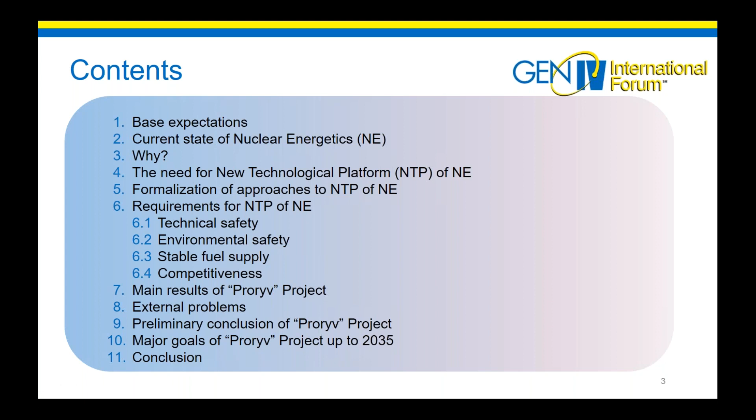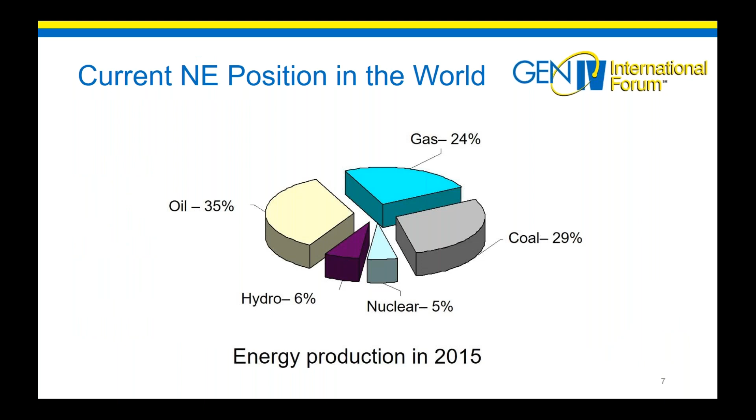Slide 7. On slide 7, you can see that today nuclear energy share is just 5% compared to other means of energy production. Slide 8. Current forecasts are also quite pessimistic, not only for Russia. Here you can see 3 scenarios. Here you can see nuclear energy share, which is marked in green, and its probable scenario, preferable scenario, and critical scenario. And they are all not very optimistic.

3 scenarios have been developed for Russia that carry on the logic of world scenarios. Probable scenario includes all the ground lines of world scenario, combining them with preservation of current economy and energy sector performance of Russia. Russian economy in this scenario will reach after 2020 moderate growth rates of 2.2–2.4%. Energy balance structure by means of generation will be kept intact in Russia. Thermal power plants will remain the foundation of electrical power generation, providing in all scenarios approximately 62% of generation by 2040. Slide 9, please.

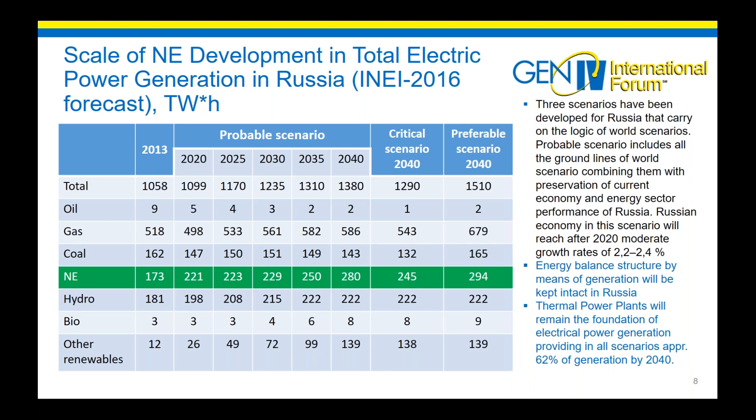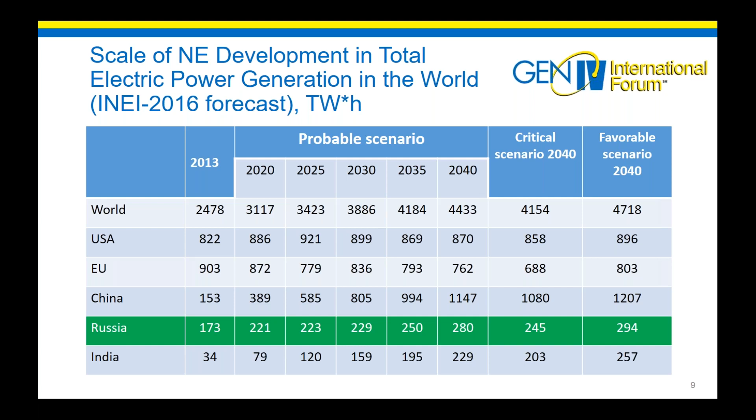Nuclear energy development scenarios are also quite pessimistic for the world in general, excluding, of course, China. Here you can see Russia marked in green. Slide 10, please. And naturally, there arises a question, why so? Let's try to answer it. Slide 11. The basis of modern world nuclear energy are thermal reactors with uranium fuel in an open nuclear fuel cycle. Here you can see annual flows of nuclear materials in open nuclear fuel cycle of 1 gigawatt electrical production.

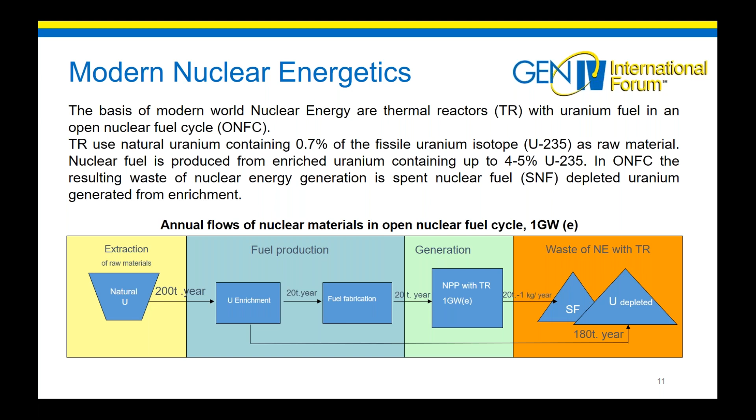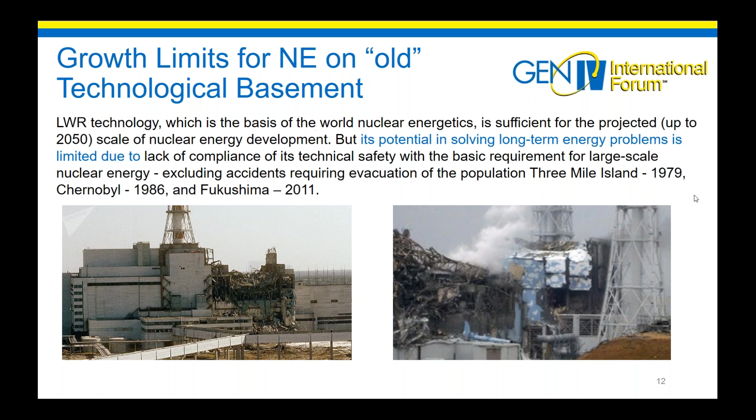On slide 12, it should be noted that the current technological base of thermal reactors with open nuclear fuel cycle is sufficient for the projected up to 2050 scale of nuclear energy development, but its potential in solving long-term energy problems is limited due to lack of compliance of its technical safety with the basic requirement for large-scale nuclear energy, excluding accidents requiring evacuation of the population. Slide 13.

But besides this obvious limitation, there are other systemic problems of the old technological basement of nuclear energetics. They are low utilization efficiency of the extracted natural uranium, lack of environmentally acceptable treatment of the long-lived high-level radioactive waste, minor actinides, and so on, and proliferation concern. Slide 14.

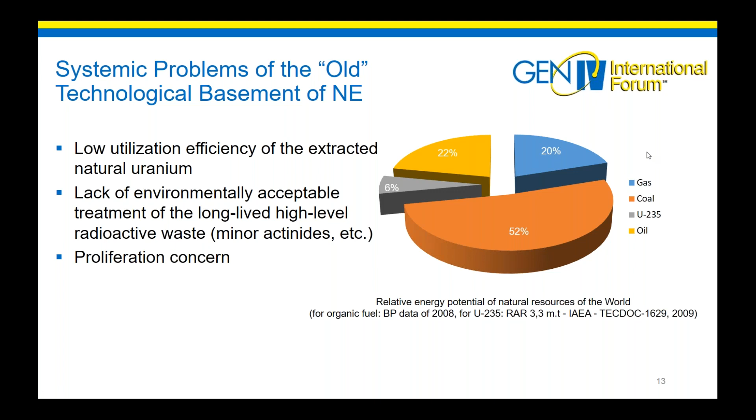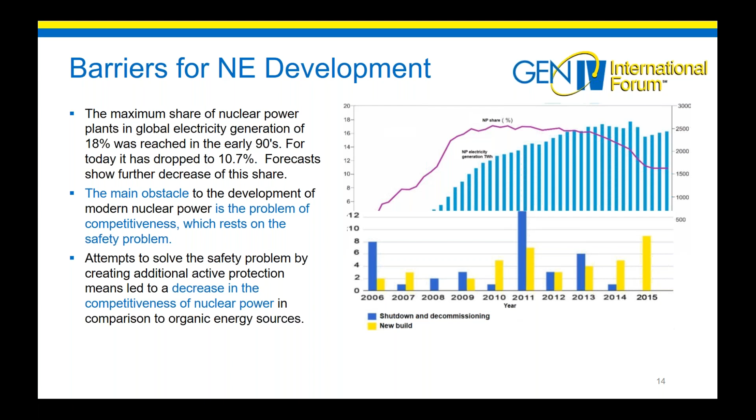Barriers for nuclear energy development. The maximum share of nuclear power plants in global electricity generation of 18% was reached in the early 90s. For today, it has dropped to 10.7%. Forecasts show further decrease of the share. The main obstacle to the development of modern nuclear power is the problem of competitiveness which rests on the safety problem. Attempts to solve the safety problem by creating additional active protection means led to a decrease in competitiveness of nuclear power in comparison to organic energy sources, which you can see on the picture here. Slide 16.

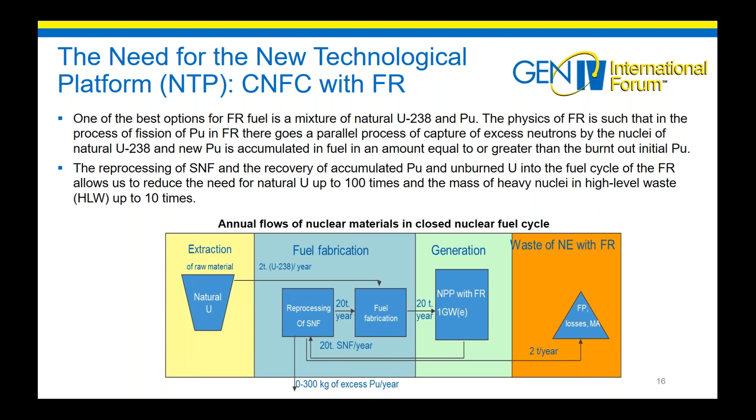Advantages of closed nuclear fuel cycle to an open nuclear fuel cycle. These advantages are in minimization of fuel and radioactive waste flows, in lowering stored spent nuclear fuel quantities, and in lowering stored plutonium quantities.

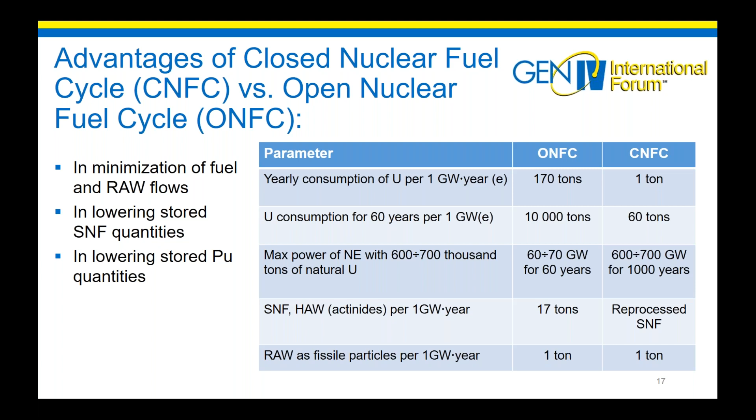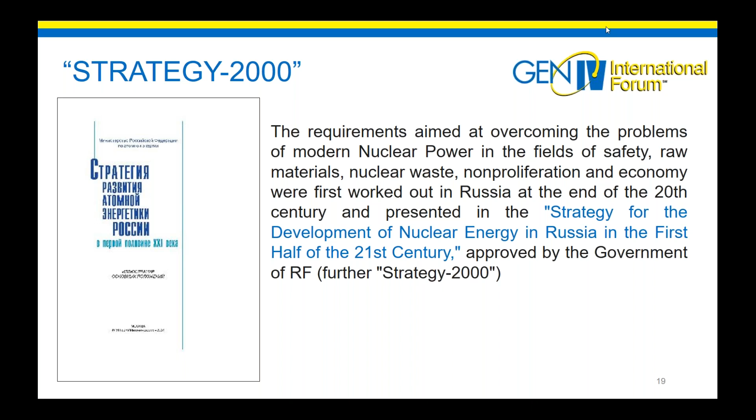The requirements aimed at overcoming the problems of modern nuclear power in the field of safety, raw materials, nuclear waste, non-proliferation, and economy were first worked out in Russia at the end of the 20th century and presented in the strategy for the development of nuclear energy in Russia in the first half of the 21st century, approved by the government. It's called Strategy 2000. Slide 20.

These requirements follow the world trend. Within the framework of the largest international forum, Generation 4, organized at the beginning of the 21st century, nuclear technology developers elaborated requirements for the new generation of reactors. Among the 6 technologies chosen for joint development, 4 are different technologies of fast reactors and closed nuclear fuel cycle.

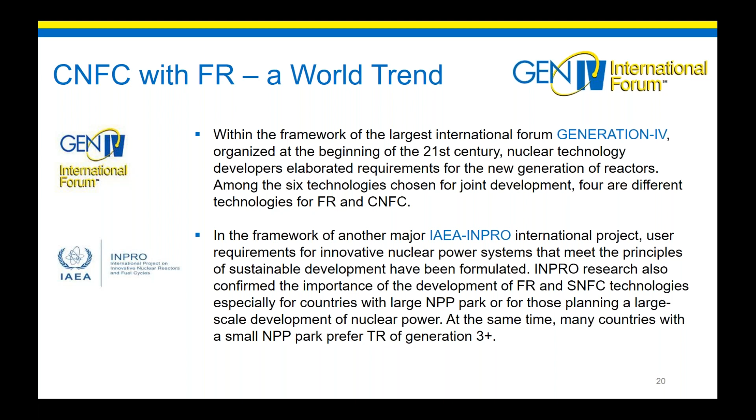In the framework of another major international project, INPRO, user requirements for innovative nuclear power systems that meet the principles of sustainable development have been formulated. INPRO research also confirmed the importance of the development of fast reactors and closed nuclear fuel cycle technologies, especially for countries with a large nuclear power plant park, or for those planning large-scale development of nuclear power. Slide 21.

Slide, yes, thank you. Now, what exactly are the requirements for the new technological platform? They are, of course, technical safety of nuclear energy, elimination of accidents that require evacuation of the population; also environmental safety of the nuclear fuel cycle, solving problems of long-lived high-level waste handling and spent nuclear fuel accumulation; sustainable fuel supply for nuclear energy, since a closed nuclear fuel cycle can become the basis for long-term provision of nuclear fuel raw materials for thousands of years; and competitiveness of nuclear energy.

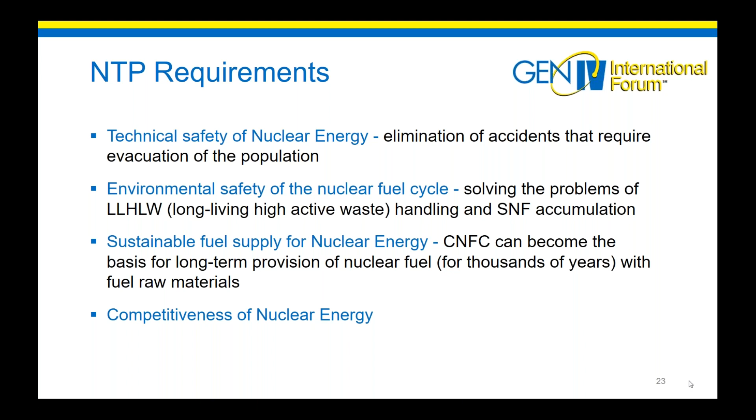Slide 25, technical safety. Let's elaborate the first requirement for the new technological platform, technical safety. The goal is clear. It's elimination of accidents at nuclear power plants and other nuclear fuel cycle facilities that require evacuation of the population. Ways to reach this goal are clear as well.

We need to eliminate reactivity accidents, which may lead to the need for evacuation of the population. Eliminate accidents with loss of heat removal, which can lead to the need for evacuation. And exclude fires and explosions at nuclear power plants, which may lead to the need for evacuation. Slide 26.

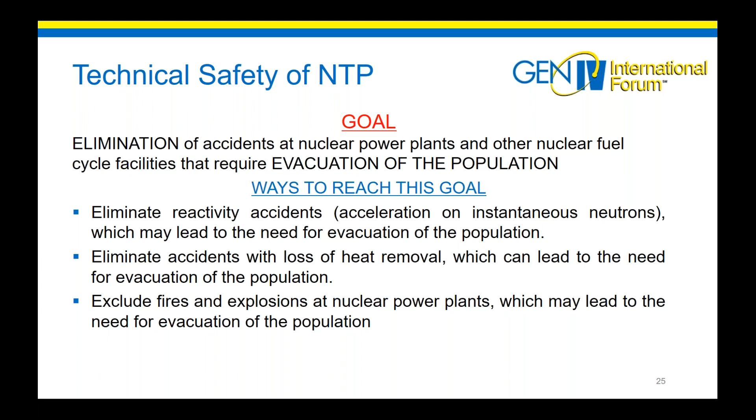The following means to reach the goal are suggested. They are dense fuel in the reactor core with zero reactivity margin for burnup, lead coolant, air heat exchanger, natural circulation of coolant with heat removal through the air heat exchanger. Fires and explosions at the reactor unit with the release of radioactivity should be excluded by physical and chemical properties of the coolant and structural materials that do not enter into an explosion or fire hazard interaction with the environment, water and air, with evolution of hydrogen.

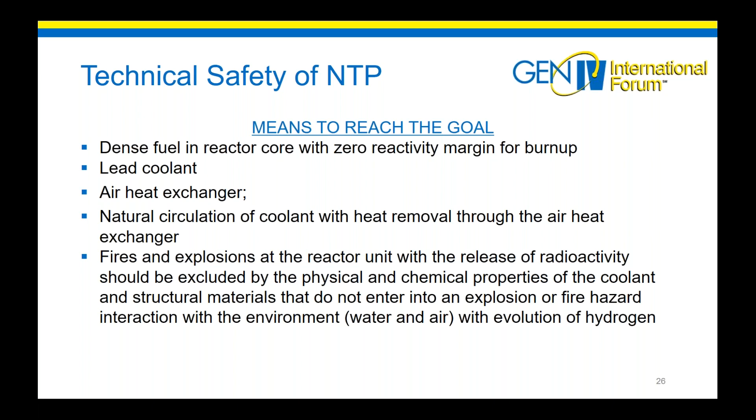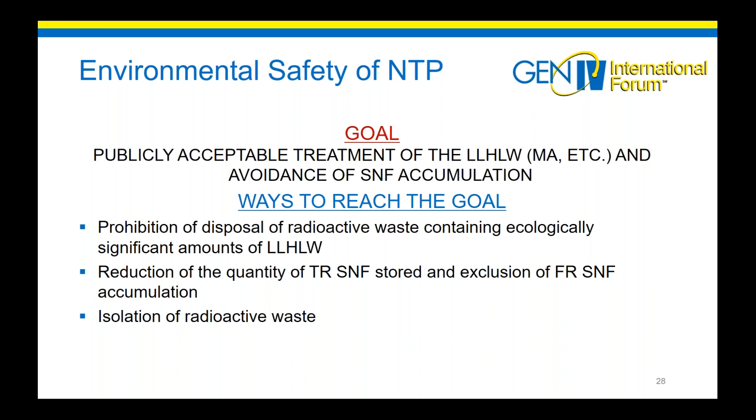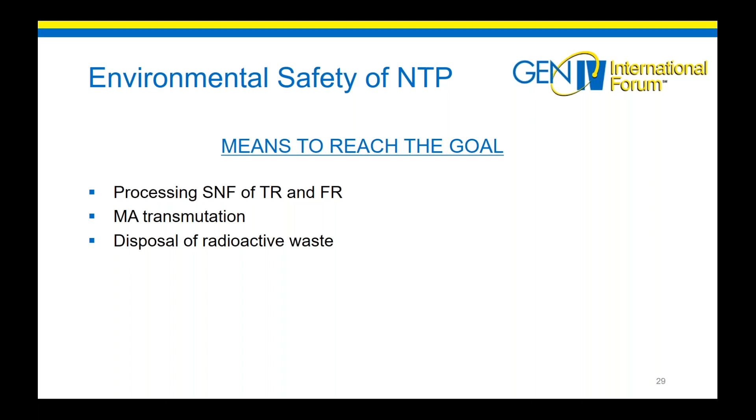Slide 29. The means to reach this goal are processing spent nuclear fuel of thermal reactors and fast reactors, minor actinides transmutation, and disposal of radioactive waste. Slide 31.

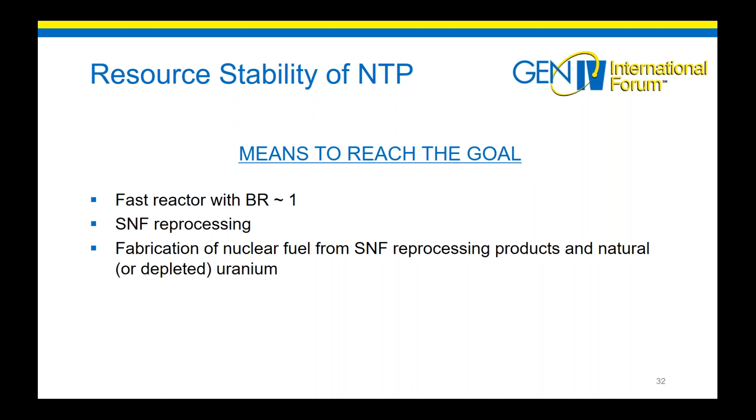Stable fuel supply. The goal is long-term provision of nuclear fuel raw materials for thousands of years. The ways to reach the goal are full reproduction of fissile nuclides in the core and transition to a closed nuclear fuel cycle. Slide 32. Means to reach the goal are in development, and they are a fast reactor with breeding ratio equal to 1, spent nuclear fuel reprocessing, and fabrication of nuclear fuel from spent nuclear fuel reprocessing products and natural or depleted uranium.

Slide 34, competitiveness. The following ways and means to reach the competitiveness goal are suggested. Elimination and simplification of a number of nuclear power plant safety systems. Reduction of construction material consumption by simplifying the design of the reactor. Reduction of the fuel component. Reduction of transportation costs. The on-site nuclear fuel cycle.

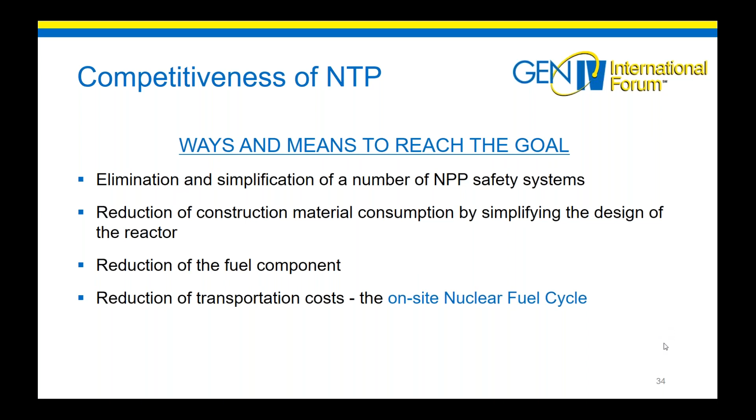Slide 35. Now let's move to the main results of research and development of new technological platform components in the Proryv project framework. Slide 37, technical safety.

As for technical safety, 7 main technical solutions for the reactor unit are suggested. Equilibrium core of the fast reactor, which allows to minimize the reactivity margin of nuclear fuel and practically exclude the acceleration on instantaneous neutrons. Also dense mononitride fuel, which makes it possible to implement an equilibrium core without uranium blanket.

Third, wide grid of the core, allowing to have such level of natural circulation that is sufficient to remove residual heat. 4. Integral layout of the reactor unit, which allows localizing coolant leaks in the bulk of the reactor body and ensuring conditions for efficient natural circulation. 5. Heavy liquid metal coolant, which allows to implement wide grating and to exclude positive void effect of reactivity.

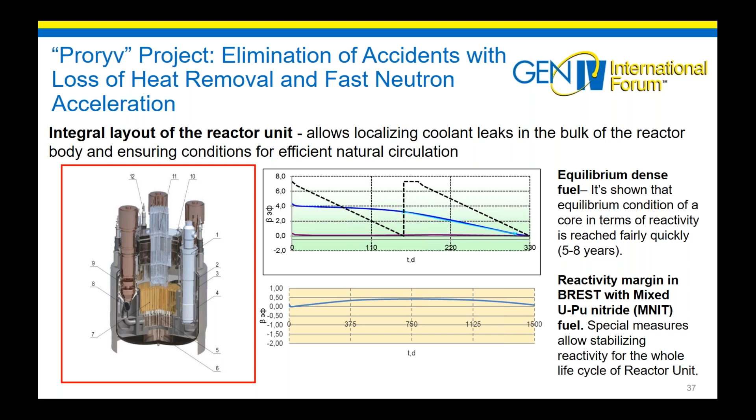Slide 38. So as for lead coolant technology, the technological regulations for the operation of lead coolant technology system for BREST reactor installation have been developed. Designs of the equipment of the lead coolant technology system also have been developed, and the means of quality control of the coolant, oxygen sensor, passed the acceptance tests. Here you can see the pictures of some of that equipment.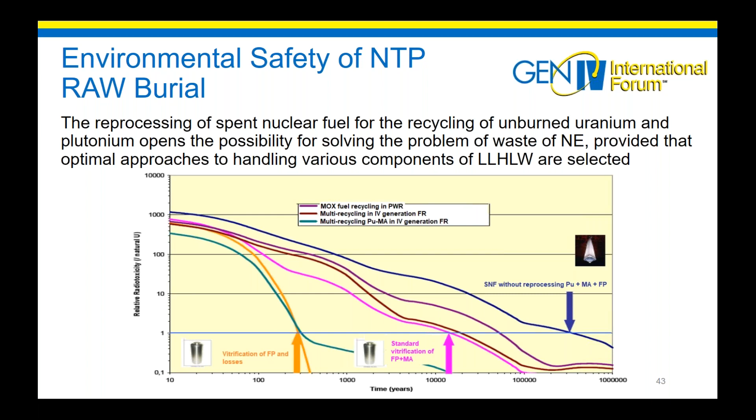Slide 45, robustness of new technological platform. 3 major technical solutions for closed nuclear fuel cycle. They are pyrochemical reprocessing of fast reactor spent nuclear fuel to reduce the duration of spent nuclear fuel retention before its reprocessing, and to exclude the separation of pure plutonium during its processing. No blanket design of fast reactors to exclude the production of weapon-grade plutonium.

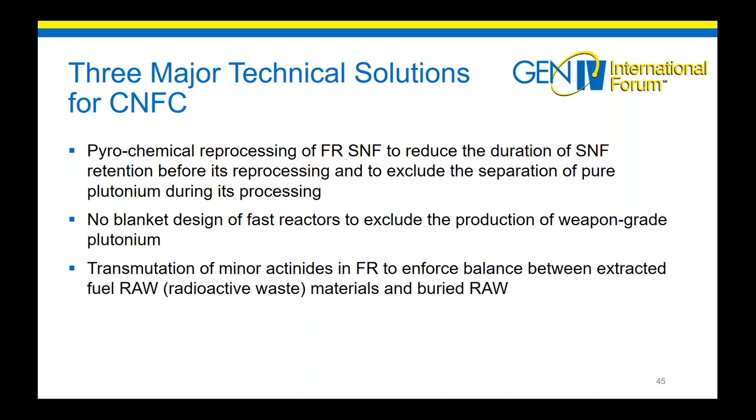Slide 47, raw material stability. As for raw material stability of new technological platform, it's enough to note that all types of fast reactors with closed nuclear fuel cycle allow changing raw materials base of nuclear energy from limited uranium-235 to practically unlimited uranium-238.

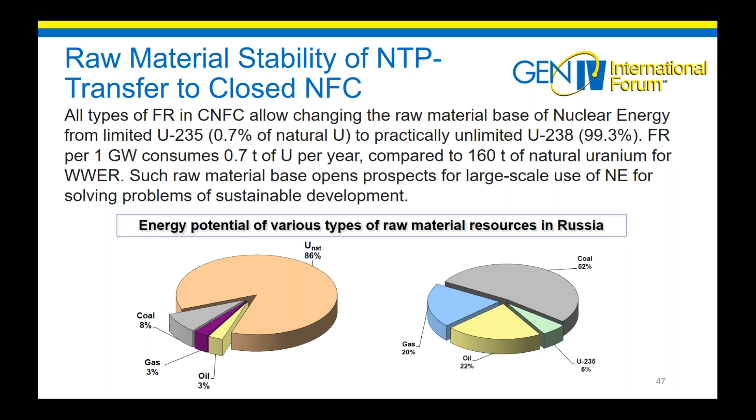Slide 49, competitiveness. In recent time, there have been presented justified calculations showing that nuclear energetics with fast reactors has high potential to increase competitiveness and that reaching equal competitiveness with organic energetics is really possible.

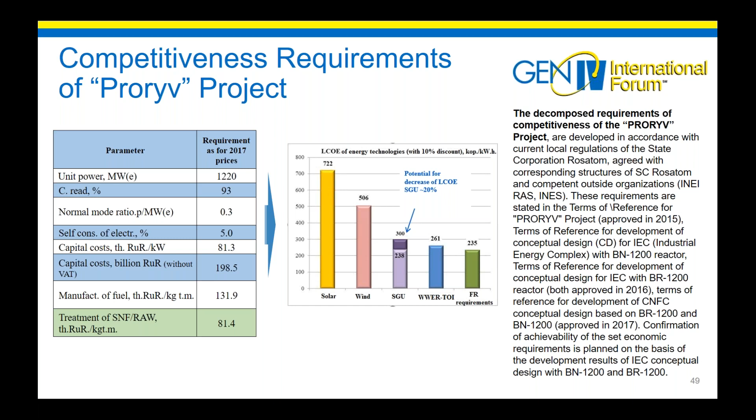Slide 51, external problems of new technological platform. Analysis of approaches in Russia and other countries to the future of nuclear energy shows the presence of 2 main trends. First, development of nuclear power on the basis of thermal reactors with open nuclear fuel cycle. And second, development of closed nuclear fuel cycle with the introduction of reactors that provide simple or extended nuclear fuel reproduction, breeding ratio more than or equal to 1. Large-scale nuclear power is only possible under the second approach.

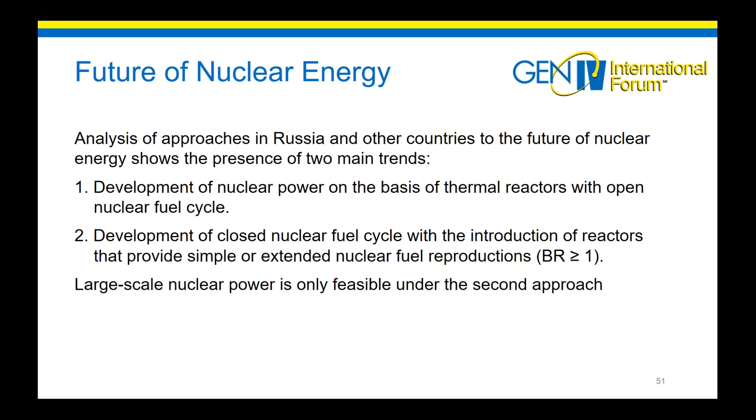Slide 53. Preliminary results in development of technological elements of new technological platform in the Proryv framework. What is being developed? It's first the pilot demonstrational energy complex, PDEC for short, which consists of lead-cooled BREST power unit, fabrication, refabrication unit for dense nuclear fuel, and reprocessing unit for spent nuclear fuel.

Second is BN-1200 power unit with sodium coolant. And third, design project of industrial energy complex with fast reactor of 1200 megawatt capacity and closed nuclear fuel cycle.

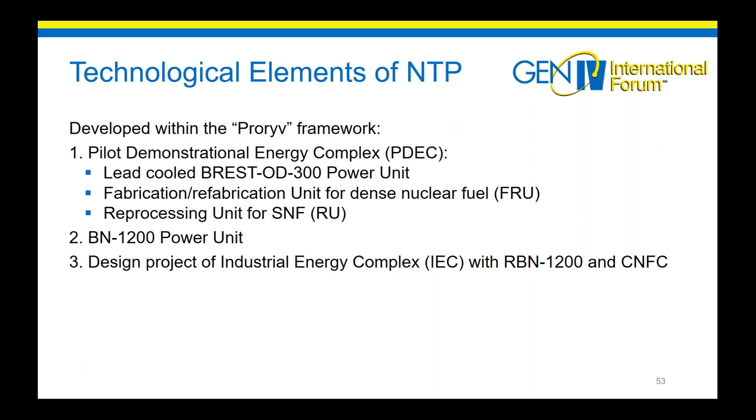Slide 54. Now about the preliminary result in choosing the base scenario for nuclear energy development in Russia. This slide shows possible development dynamics of nuclear energy structure in Russia. On this slide, you can see marked in different colors various types of Russian reactor designs, water-cooled and fast reactors with sodium or lead coolants.

Results of systemic studies show that Russian nuclear energetics can reach up to 120 gigawatts by the end of the century. Slide 56.

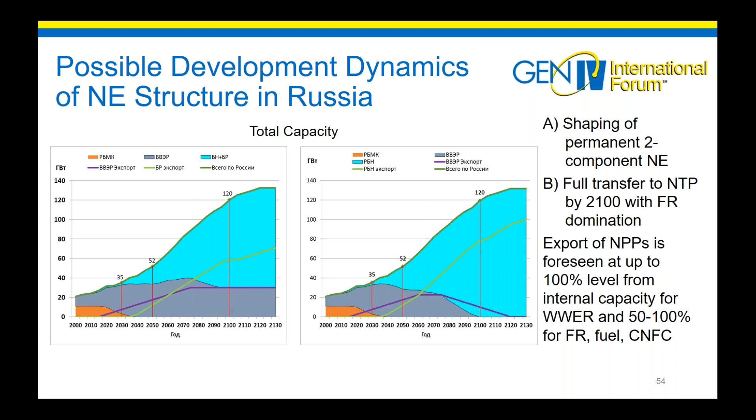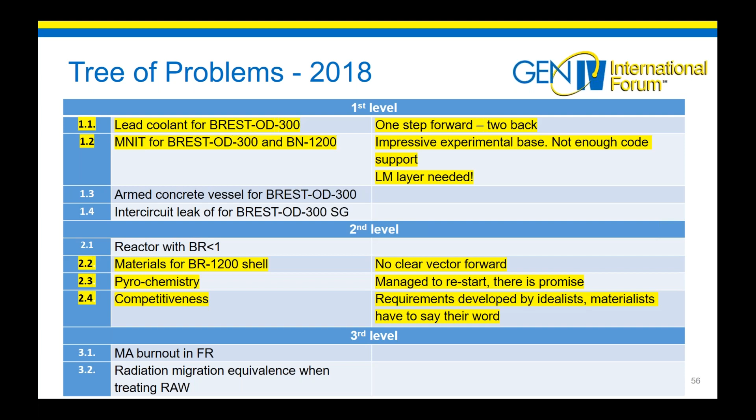This slide shows our view of the tree of problems in the Proryv framework. I will highlight only four of them. It's the lead coolant for the BREST reactor. It's mixed nitride fuel for BREST and BN-1200 reactors, and pyrochemistry. Slide 57.

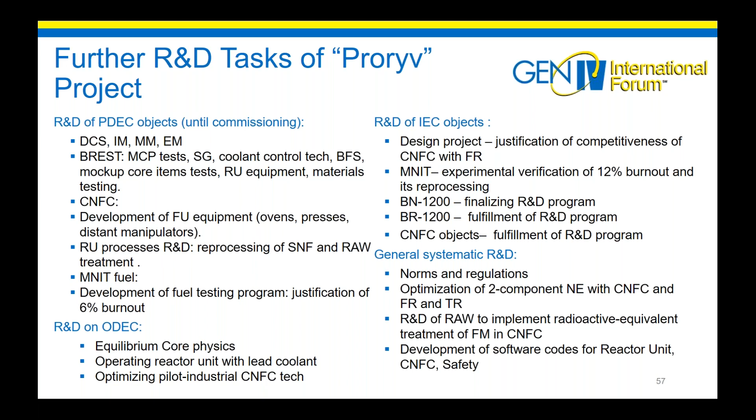The crisis of world nuclear power can be overcome by the creation, in the time period between 2018 and 2035, of the first industrial energy complex. It's going to be with the BN-1200 reactor if competitiveness with water-cooled reactors is confirmed by the design project. It can be with the BR-1200 reactor, which is competitive with CCGT and RES. Reduction of natural uranium consumption by 6 times and the growth rate of spent nuclear fuel stocks with the introduction of fast reactors. Phased introduction of spent nuclear fuel reprocessing technologies when economic feasibility is achieved.

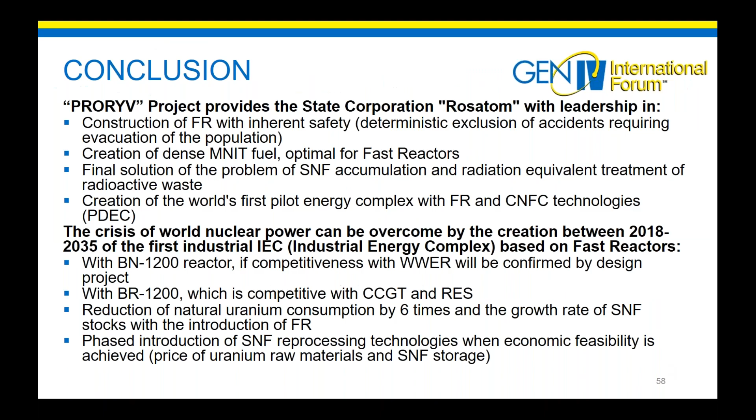Is there a reduced demand for plutonium in dense fuel, or is it the same as in the oxide fuel? Sorry, could you repeat that? Is there a reduced demand for plutonium in the dense fuel, or is it the same in the oxide fuel? You mean in the quantity of plutonium used for the same amount of... Oh, I see, they're coming with a delay. Well, I can take this question for note and clarify it for later, but from what I know, there are various scenarios that have been researched for the dense nitride fuel, but I'm going to have to come back with this question later. Okay, thank you.